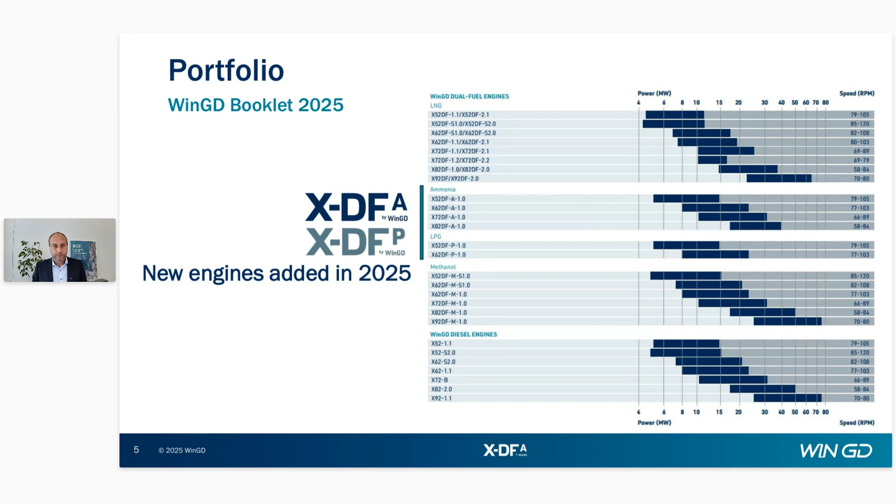I'd like to give you a brief overview of the references that we have secured with our X-DFA engine types. As you can see from this slide, we have contracted a total of 30 engines so far in commercial projects, covering the 52, 62, and 72 bore engine types. You can see the number of engines listed, along with pictures of specific projects. Many of you are probably aware of these since they've all been publicly announced.

For example, the MGC on the top left comes with the 52 bore ammonia engine, the bulk carrier series of 210K bulkers with the 72 bore, and the top right Aframax tanker series with the 62 bore engines. The others come with the 52.

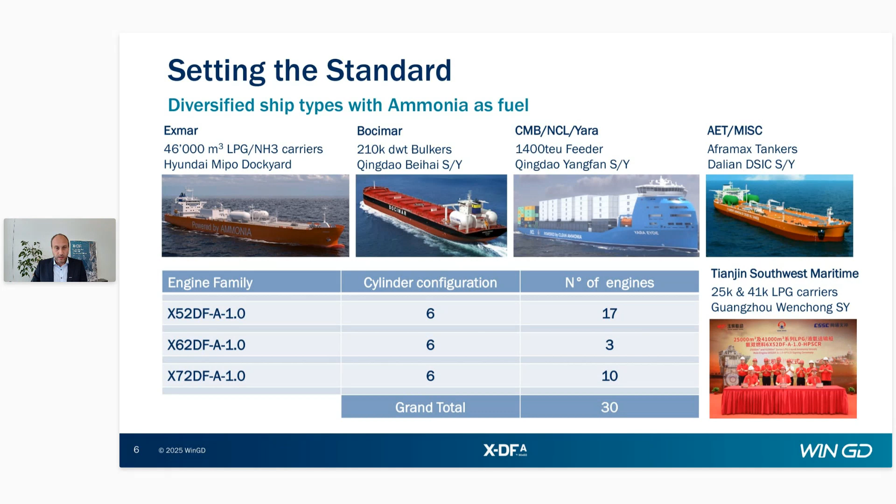So a number of contracted projects are in the pipeline, under preparation for production and delivery. Looking at the timeline here on a simple time axis, you can see that the 52 and 72 DFA engines are to be delivered to shipyards from mid-2025 onwards. We're in April now, and we're clearly approaching a significant milestone with the first commercial ammonia engine deliveries to shipyards very soon.

Work is ongoing, and the first engines are actually about to be tested at the engine builders' test beds now. As is usually the case, with 6 to 9 months between engine delivery to shipyard and vessel delivery, we expect to start having first seagoing experience with these engines by early 2026.

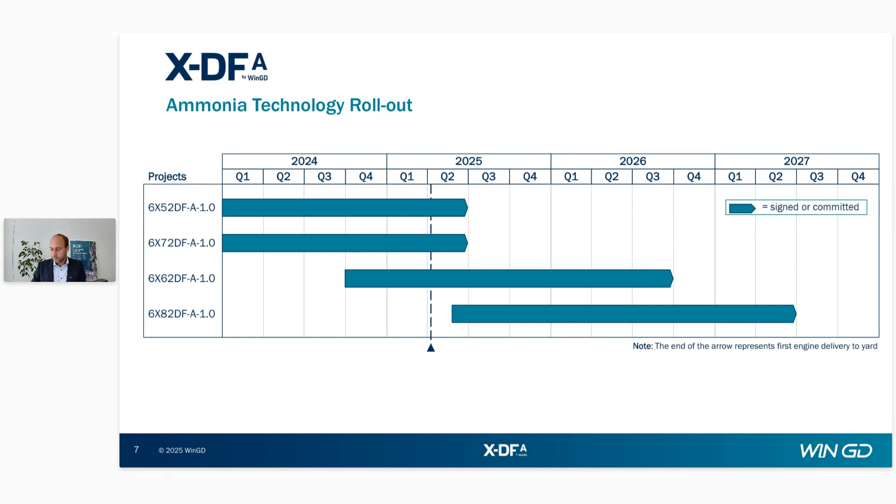A few words on the collaborative approach we use for the development of the ammonia engine, as well as related auxiliary systems such as fuel supply systems. We have a similar concept here to what we developed for LNG dual fuel engines, which is that we provide specifications and requirements for fuel supply systems, and then any shipyard or potential maker can develop a system that can be used in connection with our engines.

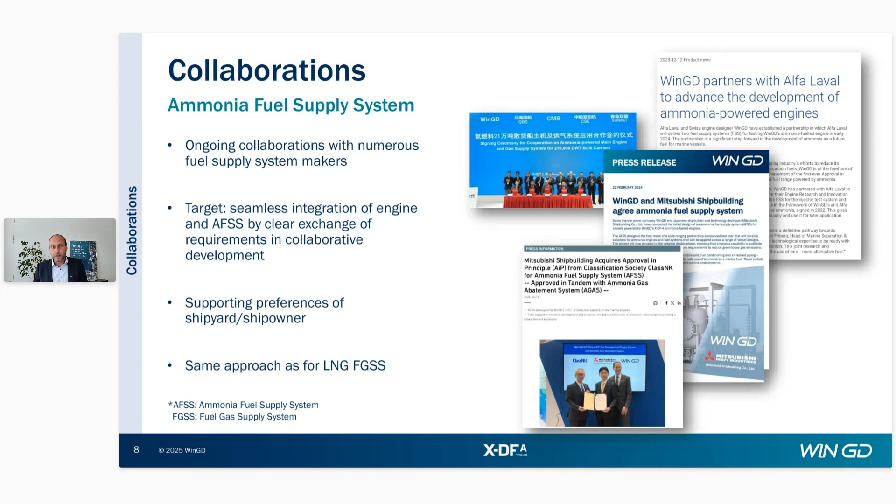What we have on the X-DFA is what we call the fuel valve unit, which is the interface between the fuel supply system and the engine. This fuel valve unit is essentially an approved component, as it includes all the interface connections and controls. Other than that, we are open to working with many different partners, and we have done so—there's already a good range of supply systems available today.

A few words on the safety side and the developments we've made there. I'd like to highlight that we've been working with classification societies from day one in the development of this engine technology. This has also resulted in the submission of the first approvals in principle for ammonia engine designs, which we've received from a number of classification societies, as you can see here.

Throughout the journey, we've also conducted a number of hazard studies. Together with classification societies, we've worked on and reviewed our safety documentation, and we've introduced design updates that were implemented as part of an iterative process as we developed that documentation.

One relevant document I'd like to mention is the one shown on the right, which we call the engine safety concept. This document summarizes the safety principles and procedures related to the design, installation, and operation of the engines, and it's also an outcome of the hazard studies we've done. This file is publicly available on our webpage, and you can find it there.

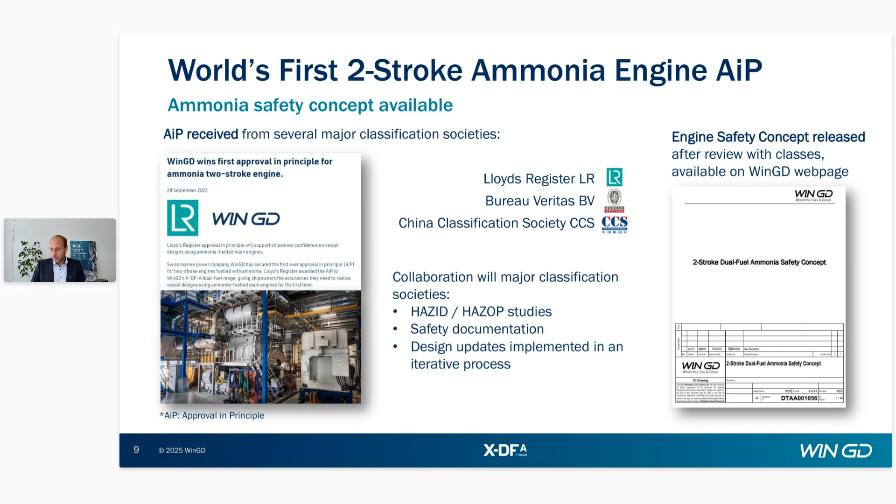A bit more on the documentation side—I think it's important to understand that on our webpage, we have an updated section that includes what we call an engine selector. As you can see from this screenshot, the page allows you to select a fuel type and vessel type, and it will automatically give you a proposal of applicable engines, under which you can download all the relevant installation-related documents. For example, for shipyards, ship designers, or owners, we have a number of relevant documents online, such as the installation manual, the installation drawing set for planning and integrating the engine into the ship design, and the safety concept mentioned earlier.

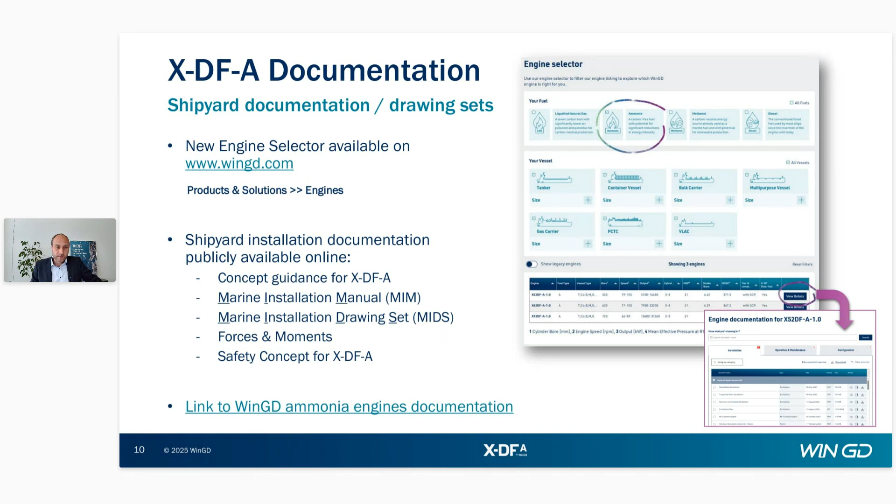There's a link at the bottom here that you can use to access this section, and all the material is publicly available. The same goes for our performance data—we have a tool called General Technical Data, or GTD. It's a publicly available tool that can be used to generate project-specific performance data, including fuel consumption figures, exhaust gas data, and ancillary system capacities, for specific project types.

In this program, we have currently included the 52 to 72 bore engines, ammonia engines, and we will add other engines as we go. It's important to mention that the performance figures we show in GTD can be fully guaranteed, same as for other engine types. As we'll see from Fabio's part of the presentation, we have very good results in terms of engine performance from the test engine.

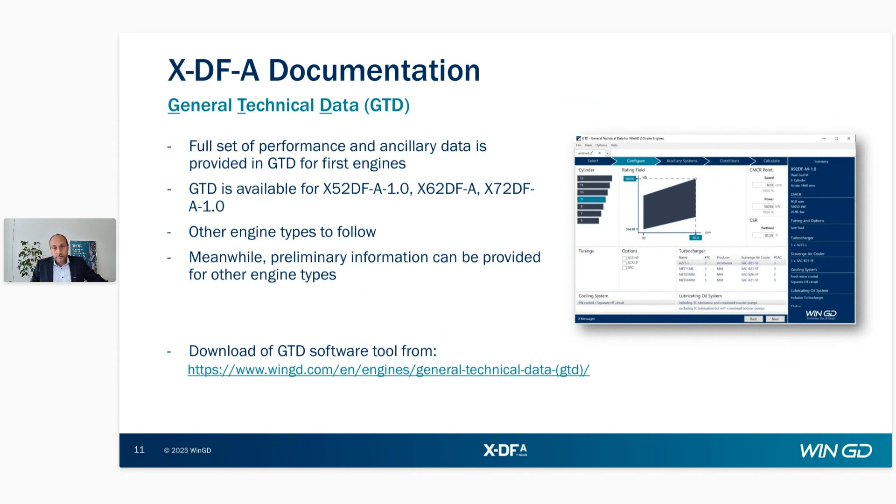On the design concept, I'd like to highlight one simple thing: the ammonia engine is not a completely new animal, but is actually fully based on the standard diesel engine design, the conventional engine design. So it's a conventional engine with an additional injection system on top, pretty much. There are a few safety-related features and functions added, but the base engine design is very much the same as on the diesel engine.

We're using a diesel cycle combustion for burning ammonia, which also means we have diesel-like efficiencies in both fuel modes, ammonia and diesel operating mode. We'll have the same power output in both modes, same as on a conventional diesel engine, and many of the diesel engine principles apply.

Also, we use the same standard proven emission abatement concept, which is SCR for Tier 3 compliance. That's our standard technology on diesel engines, and the same is applied on the ammonia engine as well.

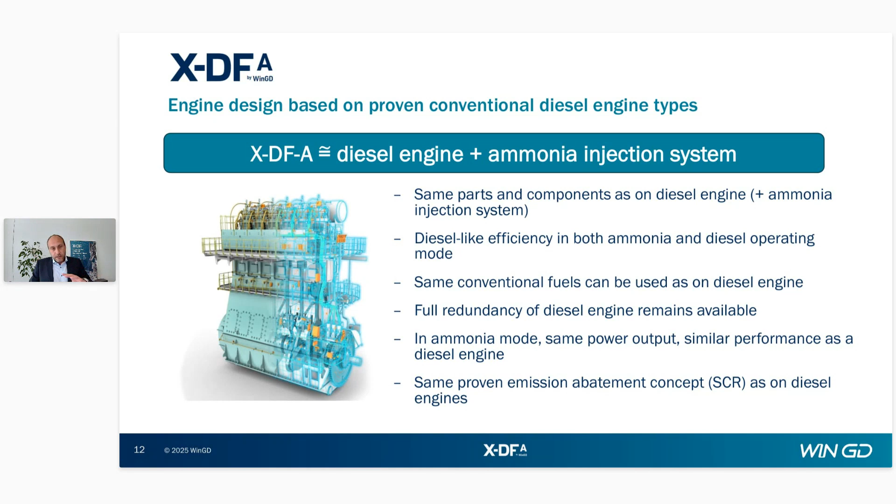So it's a diesel engine with an additional injection system. Looking at the injection system in more detail, shown in this illustration, you can see we're using a kind of pressure amplifier type injector for pressurizing and injecting ammonia into the cylinder. What you see here is the setup of one cylinder, with 3 ammonia injectors that go on top of the existing diesel injectors.

The injectors are hydraulically driven. The yellow lines represent the hydraulic actuation oil circuit, so we have oil pumps that deliver actuation oil to the control valve unit you see to the right. On the control valve unit, individual solenoid valves control the injection of each injector by feeding oil to the top part of the pressure amplifier piston.

Ammonia is fed to the injector at the lower part of the piston at a relatively moderate pressure of 85 bar, and is pressurized when the hydraulics pushes down the pressure amplifier piston, and then injected into the cylinder.

One major reason for selecting such a concept is that the ammonia is only pressurized in the injector itself. That means there are no high pressure pipes, no additional pipe connections that could leak and represent a safety risk.

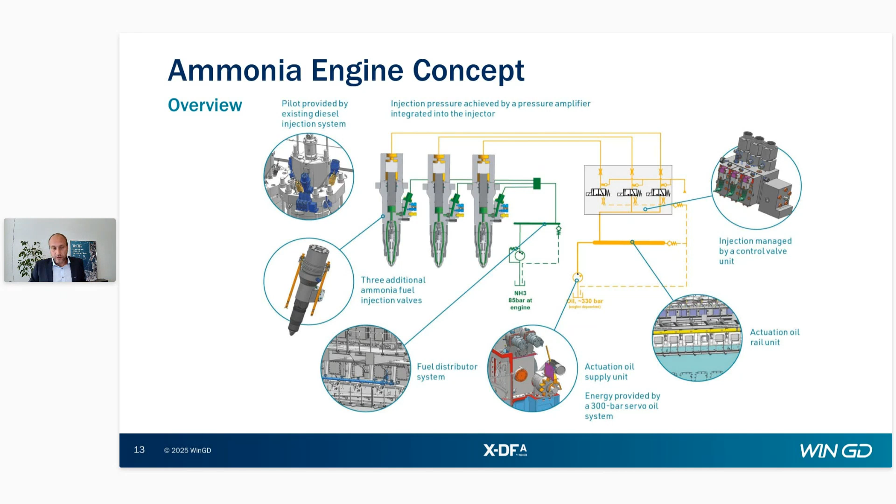Another interesting thing is that the injectors can be controlled individually in terms of timing and duration. So we have full control over each injector, which is a great benefit of these electronically controlled engines.

This shows a typical arrangement using the example of the 72-bore engine. If we look at the picture on the top right, the yellow part is the actuation oil, green are the ammonia pipes, and the injectors are also shown there. The design is fairly slim and compact, and one of the major criteria was that the system needs to be easily maintainable by the crew - the crew can maintain and overhaul all the components themselves without needing special service engineer attendance.

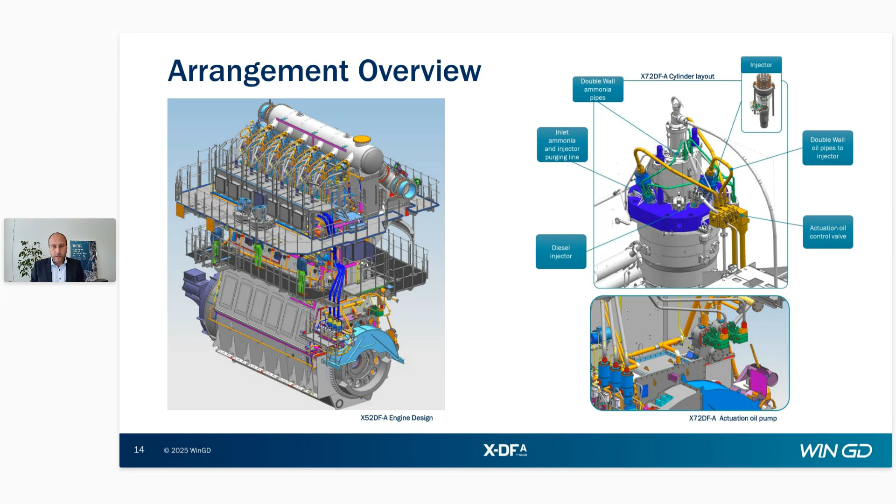With that, I'd like to go to my last part, which is the XDF-P. P stands for propane, or actually the LPG burning type of this engine. So far, WinGD has not had an LPG burning engine in our portfolio, because we did not have a liquid gas injection engine design. With the ammonia engine design, that has changed, and that makes it very simple and reasonable to also have an LPG burning version of that engine type.

What we have here is a very simple modification of the ammonia engine by adjustment of the hydraulic volumes in the injector, which allows us to optimize the injector for injection of LPG instead of ammonia. The target segments here are VLGC, VLAC vessels, or MGC - the typical gas carriers, most of which actually burn LPG at this moment or upon delivery.

With this design, because it's fully based on the ammonia engine design, it's possible to very easily upgrade the engine to ammonia burning in the future by only replacing the injectors and upgrading the control system software. So we're providing a future-proof and flexible solution to gas carrier operators that allows them to switch from LPG to ammonia whenever they think it's necessary.

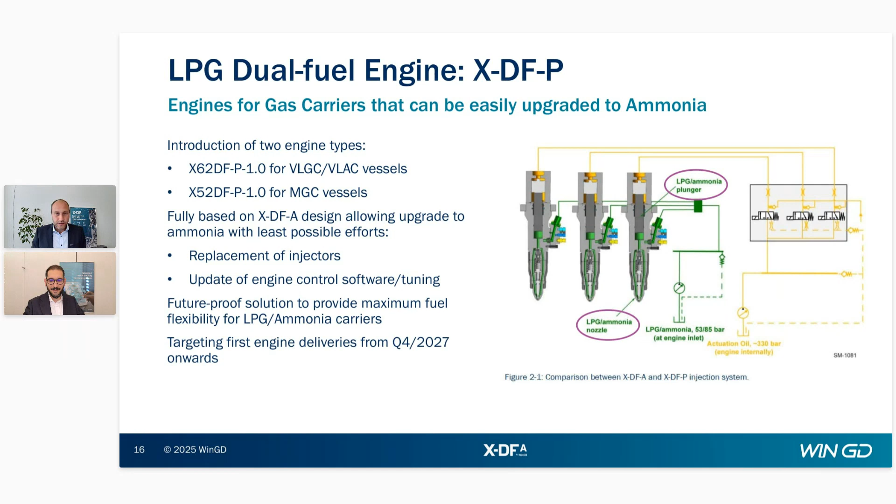Thank you, Marcel. My name is Fabio Pocetta, Product Manager Engines. Today I would like to introduce you to our WinGD validation process for the ammonia technology, and also recap on some of the results we have achieved.

Back in 2022, we ran combustion tests at WinGD with the aim of optimizing the combustion layout, as well as deriving the technical specification for the design team to design the proper injection system. After having the prototype drawings, we started the manufacturing process at our sub-suppliers.

In parallel, we had a hydraulic rig test, which was able to test components during the manufacturing process - early components from the production line - to provide feedback to the suppliers for corrective action until we achieved the expected performance from the components. The hydraulic rig test was also used to achieve system performance, because on these rigs we can mount the entire injection system and characterize it.

Once this was done, we started with full-scale test engines. The first step was on the RTX6 engines we have here in Switzerland. We tested the injection system on real engine operating conditions - vibrations, high temperature from combustion, as well as combustion products. After 100% load was done and the test was considered passed...

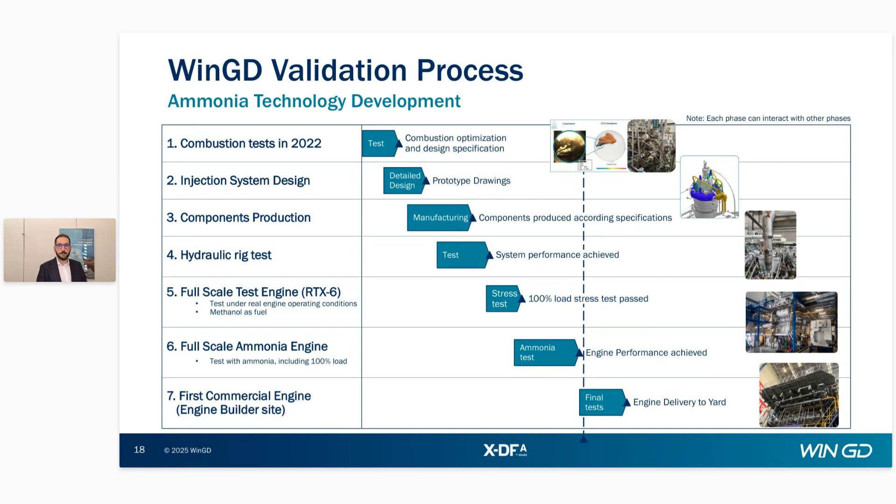It's worth mentioning, even though this webinar is about ammonia, that the same validation process was used for methanol technology development.

So basically the spray combustion chamber, as you can see top left, then hydraulic rigs used in this bore size 92 for the 10X92 DFM engine, the first methanol engine from WinGD. Then full-scale test engine on the bottom left, and then the 10X92 DFM at CMD.

That was the process. Looking at the timing, commissioning of this engine started beginning of December 2024, and the factory acceptance test was 1.5 months later. Roughly 1 week later, the type approval test was done with no comments from classes. So this is not a surprise.

We were working with classification societies since the early days of development, sharing our technology concept and addressing all their recommendations. That was done for ammonia as well.

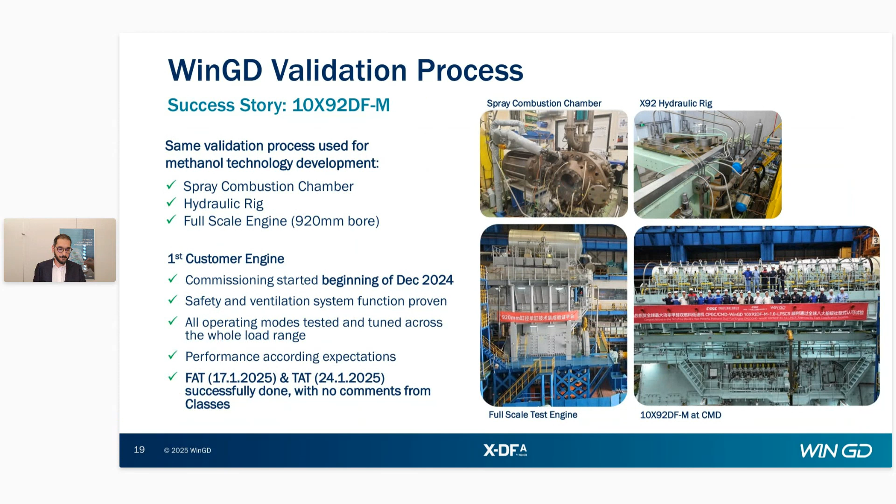Next, coming back to the XDFA engine, the ammonia engine, we'll go through a bunch of performance numbers. First of all, Marcel already told you that the engine efficiency was same as diesel.

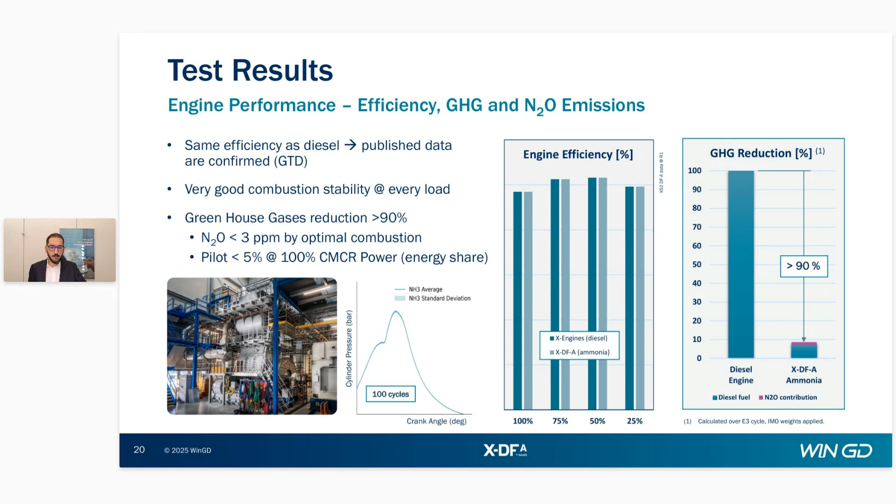Now in the next slide, we are going through other types of emissions typical from ammonia engines, so NH3 emissions and NOx emissions. We measured basically NH3 emissions less than 10 ppm engine out. The green bar on the charts is the range we have measured, so below 10 ppm and below 2 ppm as a minimum. That's the range we measured over all the loads.

Also here, it was a target for the injection system design to reduce as much as possible those NH3 emissions, which are coming from design parameters, but also optimal combustion.

The NOx reduction, which we observed preliminary, now we're talking about tier 2 diesel data versus ammonia data, we observed more than 40% NOx reduction. So a lot of margin with respect to tier 2 and tier 3 limits.

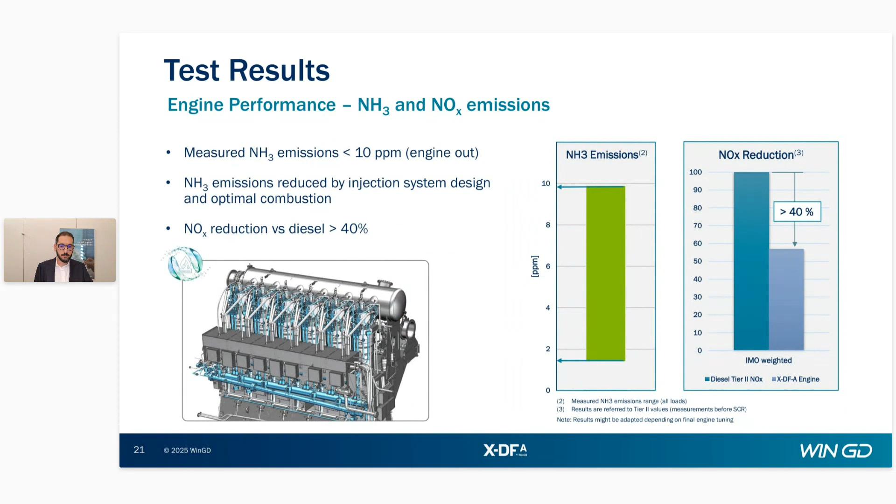Regarding the emission abatement for XDFA, we don't request any fancy catalyst technology. The SCR we use with the diesel engine works very well also for XDFA. We recommend high pressure SCR only. We don't need the specific catalyst for N2O because of what we said, so N2O abatement systems are not required. The N2O emissions are very low. And NH3 catalysts as well, like ammonia slip catalysts, are not requested in our case.

We also offer the integrated SCR, ISCR namely. We recommend the adoption of this design for 52 and 62 engines because it offers additional optimization potential for fuel consumption and reduces yard installation effort. And being closer to the engine, it's also an advantage when it comes to ammonia engines, which typically have lower exhaust temperature.

We can also mention that early this year, in January, we got the type approval test for the ISCR. This was successfully completed with the participation of 8 classification societies. And we are also having a lot of running hours in the field with this technology, so it's a proven technology.

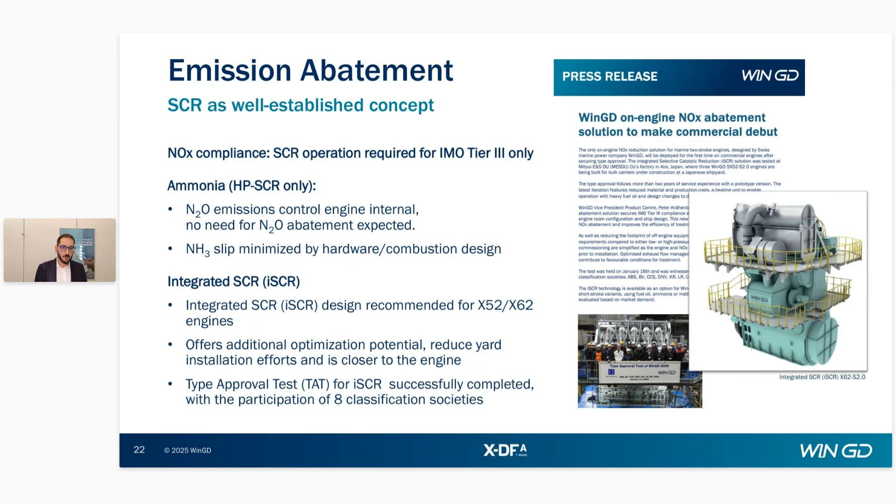Okay, now let me start with the plant side. We discussed the engine and the results. If you look at this schematic and go to the light green box on the right side of the slide, you will find the ammonia storage tank. From this tank, we get ammonia straight into the engine.

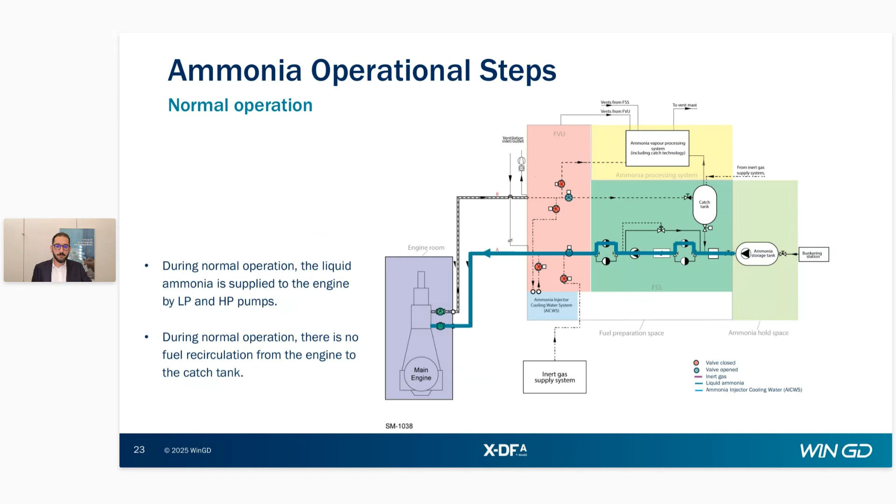During the ammonia operation of the engine, we don't use the return line with ammonia, so basically there's no ammonia in the return line. Now I will go to the purging process. If you look at the red box, it indicates a valve which is now closed. So for starting the purging procedure, we interrupt the ammonia supply, which is normally at 85 bar.

We then depressurize the ammonia system towards the catch tank at 22 bar. And then we open the green valve that you can see, which is attached to the green box. The inert gas supply is open, and we use the inert gas to purge the system, to purge ammonia. This is done in a specific sequence on every cylinder and on every part of the ammonia injection system to ensure the removal of ammonia from all the parts of the system.

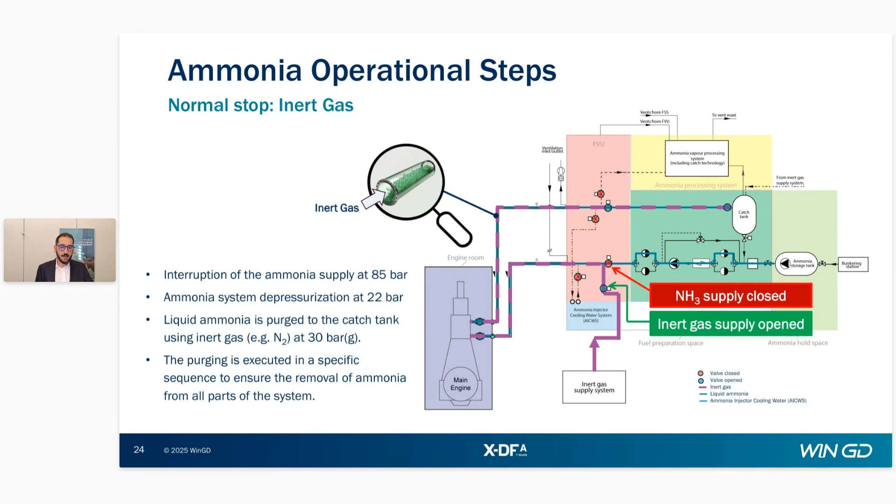But there is another step that we use. At a certain point, we close the inert gas supply, and we start to supply water into the system through a system called the ammonia injector cooling water system. Basically, if you see the light blue box, that's the AICWS system, and water is flowing through the pipes, through the ammonia pipes. The aim of this procedure is to remove any remaining traces of liquid ammonia which might be trapped in any cross-section of the system.

Plus, we keep the flow of water through the injectors, also to cool them down and to improve the reliability of the injector when diesel mode is on. The system has been designed to not exceed 10% ammonia contamination into water, which means the tank at the end will contain a sort of household ammonia solution, which we normally use also for cleaning surfaces, for cleaning apartments.

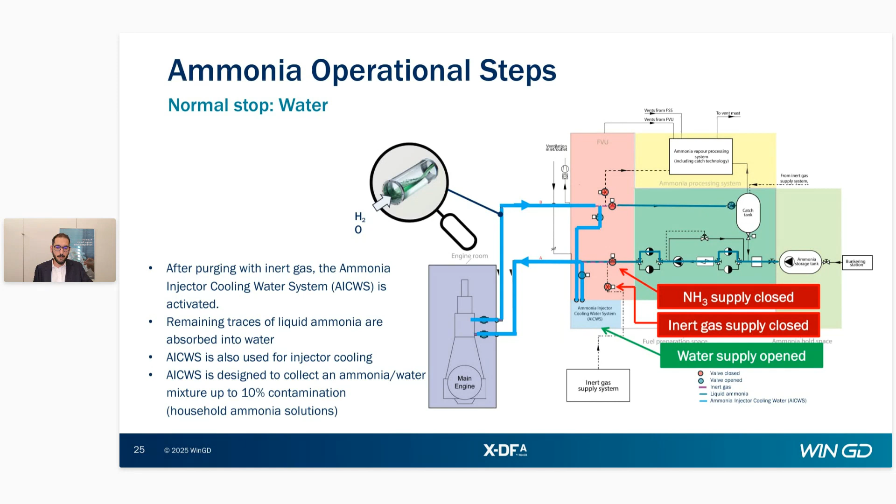A bit of a summary of the operational steps. In this chart, you see the power percentage on the x-axis. We have the ammonia mode, shown in yellow, which is offered between 25% and 100%. We are also working on an extension of the operating range towards 10% and even lower. The diesel mode is available from 0 to 110%, and the transfer to ammonia happens between 25% and 80%. Apart from the diesel and ammonia modes, we also have the possibility of an ammonia standby stop.

This is possible when we need to, for example, change over to diesel mode for a defined period. We discussed also this with classes - no purging is required, and the ammonia system can remain ready to re-inject ammonia. But of course, if this defined period is too long, the normal stop is requested.

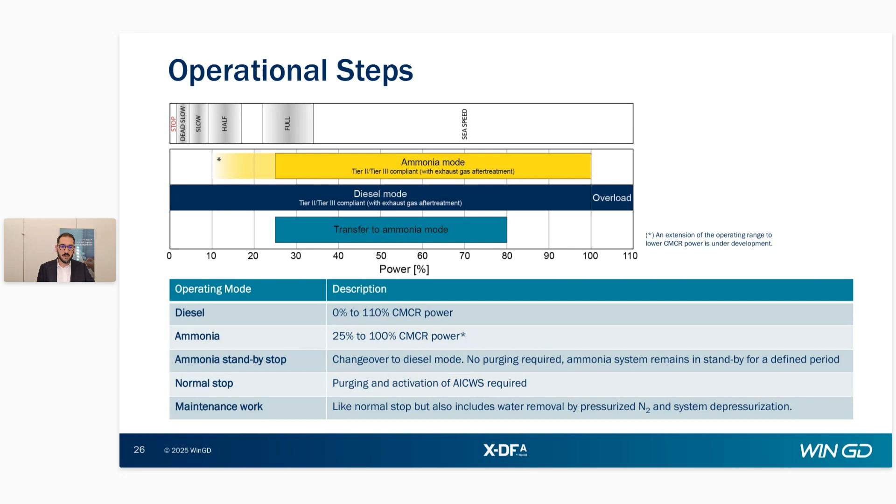So purging and activation of the ammonia injector cooling water system is required as described in the previous slide. For maintenance work, to keep our crews safe, we use basically the normal stop, and then the water is removed by pressurized N2 and the system is depressurized. This allowed the crew to have a high confidence level that ammonia is not anymore in the system.

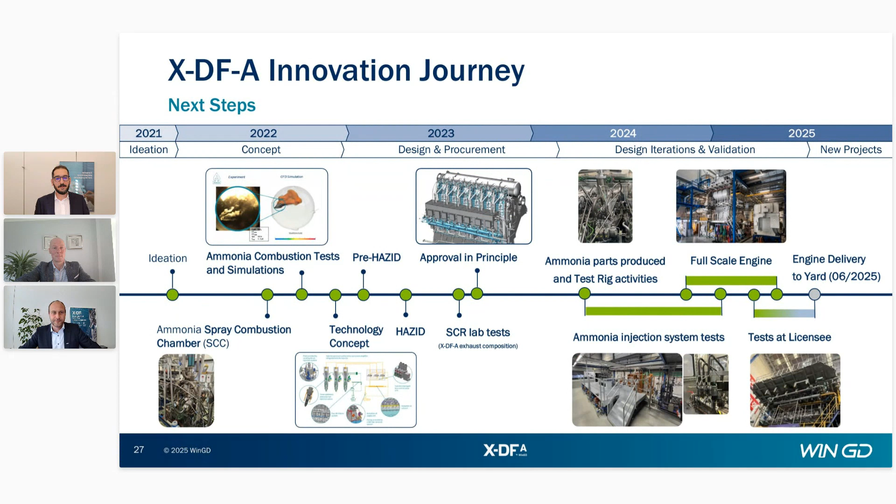Okay, thank you very much, Marcel and Fabio, for your nice presentation. I have, in the meantime, looked in the chat box, and there are many questions, and thank you very much for that. I have tried to see if I could put this into different themes while you have been presenting. There is a number of questions related to safety and leakages.

So maybe that goes to you, Marcel. How is crew safety ensured in case of an ammonia leakage? Yeah, valid question. And as you say, safety is a concern that needs to be handled seriously. I think what we can say here is that we have applied many of the principles that have been developed by us on the engine side, but also by classification societies for LNG as a fuel in the first place.

One of the standard principles is that we have this gas-safe engine room concept, which means that all ammonia-containing piping and components are of a double wall design. That means if there is any leakage of the inner piping system, it will go into the double wall annular space first, where we do have detection measures with ventilation and sniffers, and by that can avoid that a leak is going into the engine room directly. That's one of the major principles we have applied, that we know works well from LNG dual fuel, and we have also seen on the test beds we have run on the test engine. We have run specific tests to confirm that this system works well.